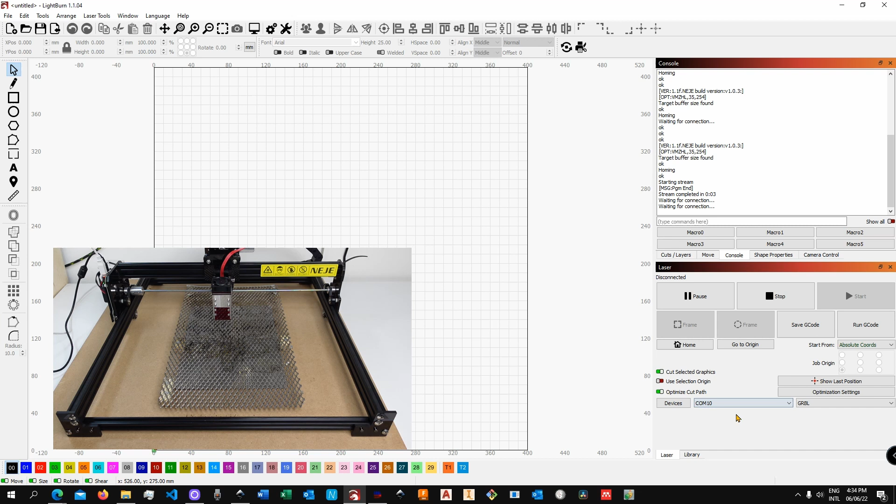Now, something else you will want to do is switch to the machine, GRBL, so that it gives you all the parameters for that specific machine. Now, you can see we lost the connection. So what you want to do is go to choose and back to COM10. Once you do that, the machine will automatically home, which means the connection is all right. You can see over here, okay, homing, and then okay.

The console is a very important thing that, with time, it's good to know how to read. It is not important when you get started, but over time you will realize it is actually good, because it will help you out with other stuff, problems, diagnostics, and so on.

All right, so now, similar to what I did with LaserGRBL, let me give you a very quick overview. This software is massive compared to LaserGRBL and the Neje desktop application, so it's not possible to show you everything, but I will try to show you the most important things to get started.

Once again, over here we've got the canvas in the center, which this time has the exact dimension of your machine, so it's 400 by 400. You can see over here the coordinate system. Then what you will need to know.

Let's start from the top. On the top you have some tools, okay? Some are for file import, and others are for control of whatever you have loaded, like grouping, flipping, and positioning, and whatever.

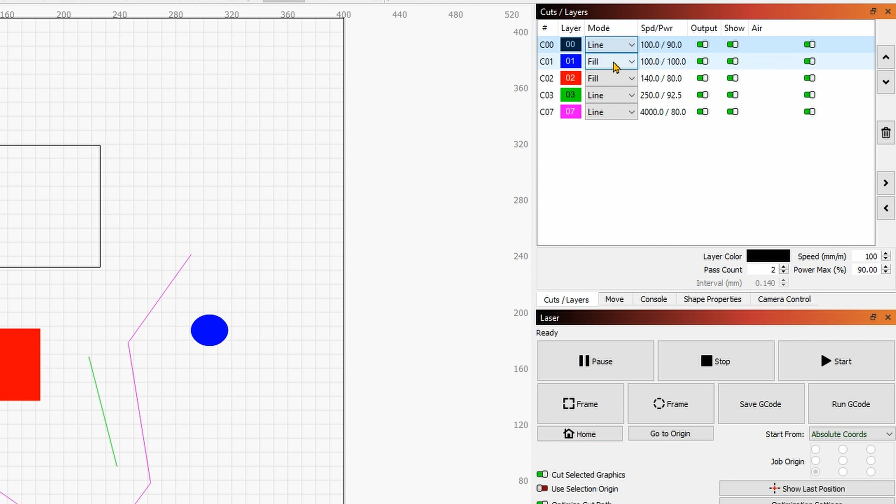Then you can see over here, on the bottom of this section called cuts and layers, you have the layer color, the pass count, so how many passes you want. As I said, in LaserGRBL it's the same — if you want to cut, you might need to pass multiple times in order to actually go through your material. Then you have here the speed, for example, the power, and the interval.

Now this interval will be applicable for things with fill. If you go to the blue layer, which is set to fill, so that's going to be effectively full, you can actually change up and down the interval in millimeters.

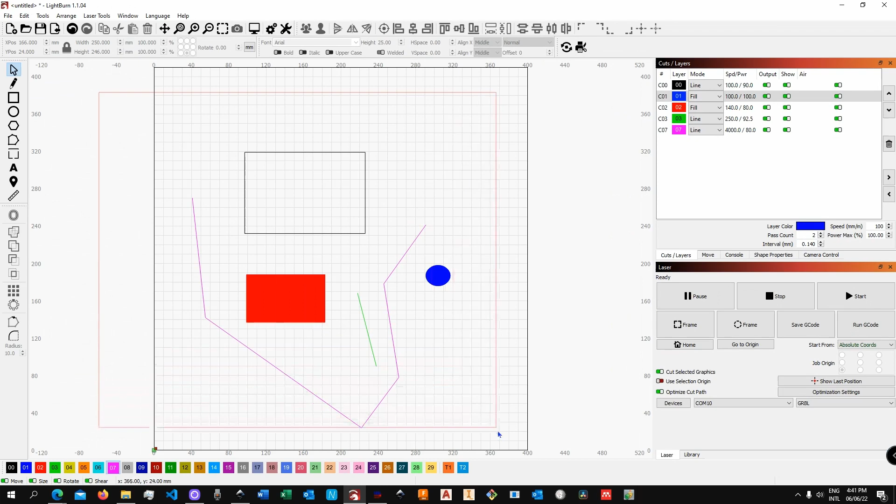Okay, now the approach in this software is a little bit different. In LaserGRBL we have lines per millimeter. Here instead we have the actual millimeter. Okay, and the other thing is that you can select what you want. You can basically instruct the software to cut only what is selected when you toggle this on, or everything, whatever is in between the canvas. So you can exclude things.

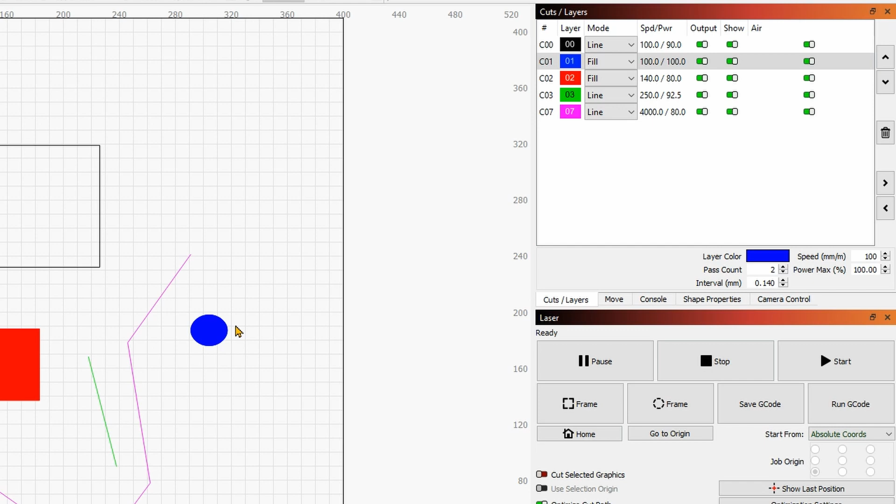You can also toggle layers on and off. So these layers that are now with the output toggled to off will effectively not be engraved, even if they are selected. Okay, so this is cool. You can reach a very high degree of control for your specific project. Okay, and the other thing is, let me toggle this back on.

Cut selected graphics. You can select. You can have your preview. Now here you have your preview. You can see the cut distance, also the rapid moves, and what is the estimated time for this project. 12 hours, 7 minutes, whatever. This is massive, what I did here. And you can also have a simulation of what is going on, as you can see. Okay, so you can click on play and you can see this moving back and forth.

Okay, then the other thing is you can also show the traversal move. That means when the laser is actually not engraving. And this is cool if you want to place something in between, or if there is stuff that the machine may collide with. You can actually rearrange the way this starts. Okay, there are many things that you can actually manipulate here.

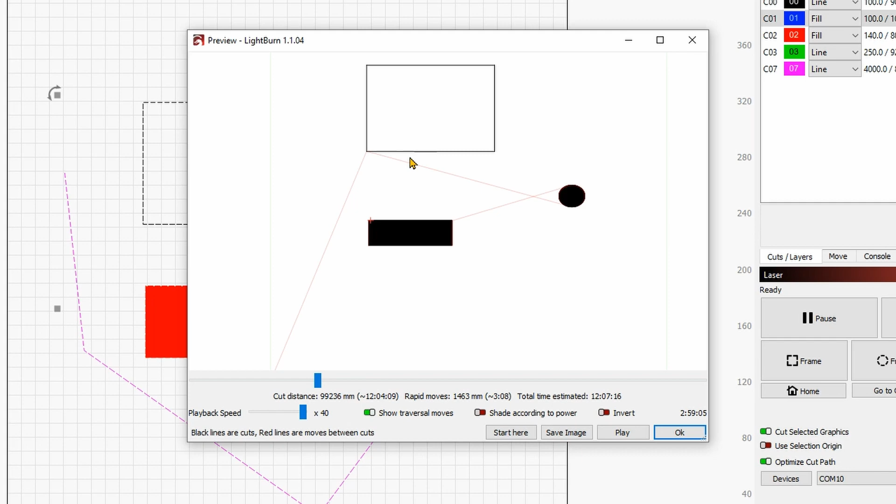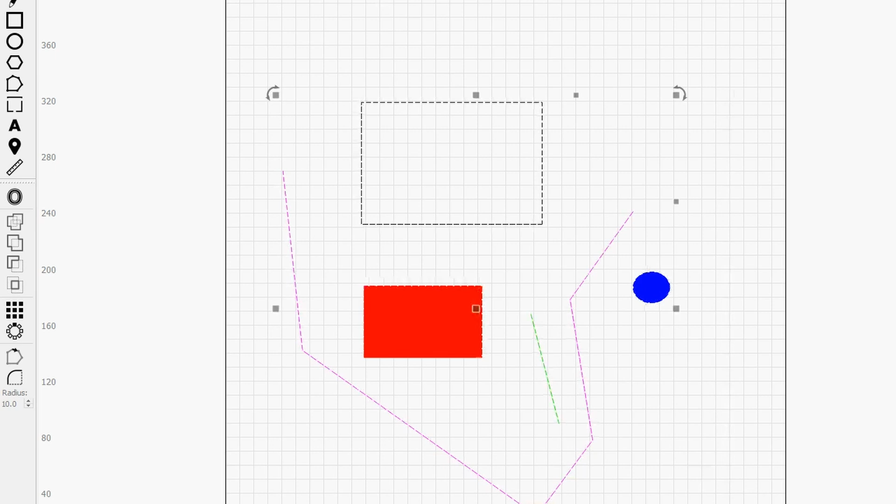You can also decide if you want, for example, this rectangle to start from one side or from the other. You can, for example, select here the start shape point, so you can set it over here or over here, for example. And now if we go back to our preview, you can see that the free move doesn't pass through this area anymore. So if in this area I had something, then it's not going to collide with it.

Okay, and that's something that you might ask yourself now. It could be, for example, a magnet to simply keep the material fixed to the mesh or to the base or whatever. And so you don't want the magnet to be kicked off by the laser module as it moves. And like this, you make sure that the magnet is not going to be touched. And you can also run a dry simulation. That means without actually giving power output, to see the machine moving around.

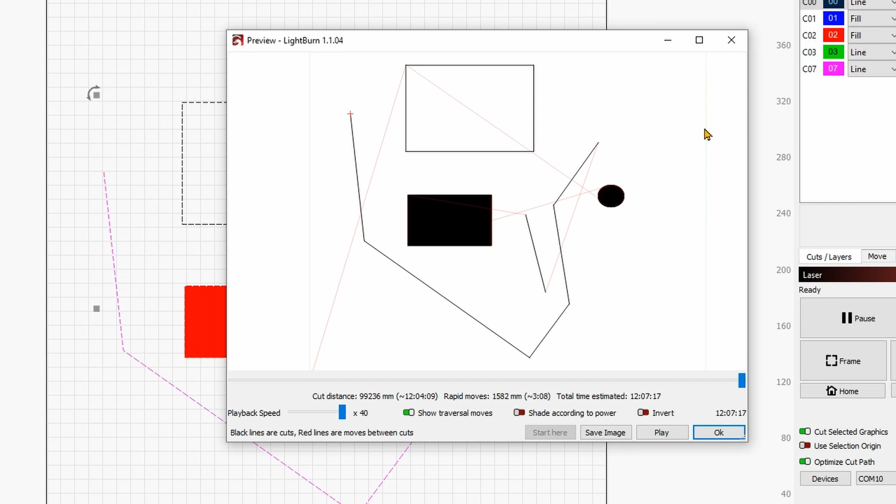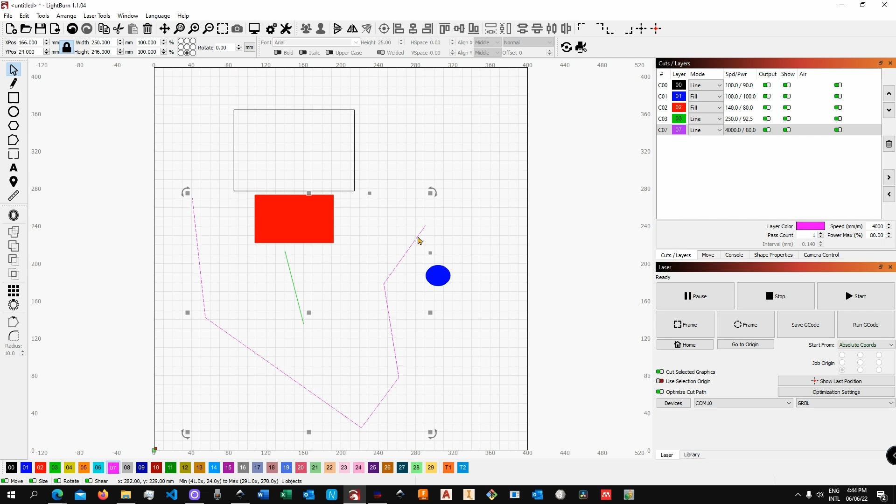Okay. And so as you can see here, we have a bunch of things that we can do. Select stuff, we can align them to the center, we can move them around, we can distribute them evenly, as you can see. We can do a whole bunch of things. Then we can actually edit this line. You have the edit mode, and so you can edit the independent nodes.

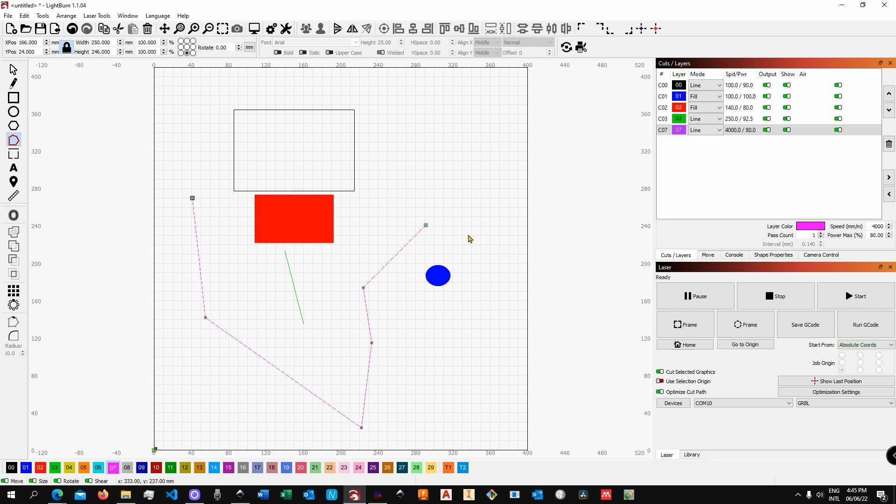A side note here is that you are not able, in this version yet, to actually position the nodes by coordinates. So unfortunately, and I hope this is going to be implemented in the future, but in Inkscape it's something that you can do, and it's very handy for designing purposes. But you can still move them around, and you can use the arrow keys to move them. My arrow key right now is set to 1 millimeter, so I know that each click is 1 millimeter. If I do shift arrow, I know that it's 10 millimeters, and so on. I mean, there are a bunch of things. It's like a huge software for this kind of thing, okay?

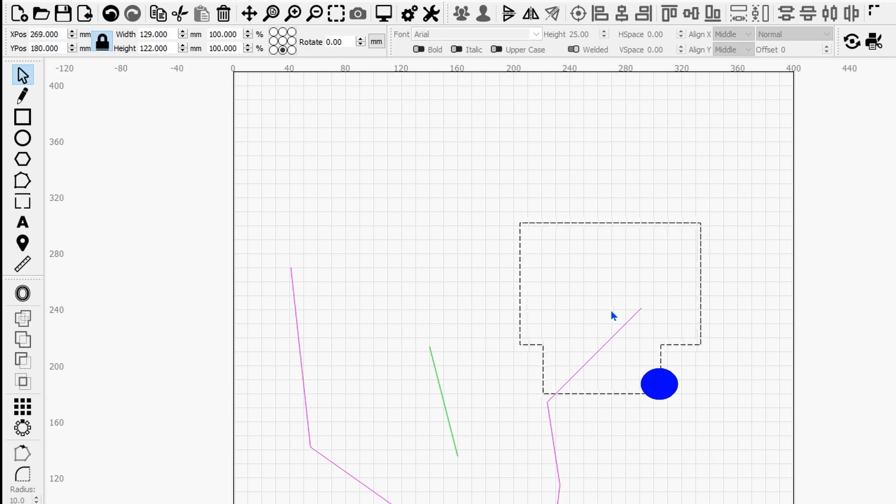Then, for example, we talked about the Boolean, so I can select this and I can, for example, weld these things together. And as you can see now, it's a single but more complex shape. Let me do this with the oval over here. So weld, and as you can see, now it's welded. It's a weird complex shape which you otherwise weren't able to do as easily as right now. And so you can basically draw simple things, and you are able to do more complex things.

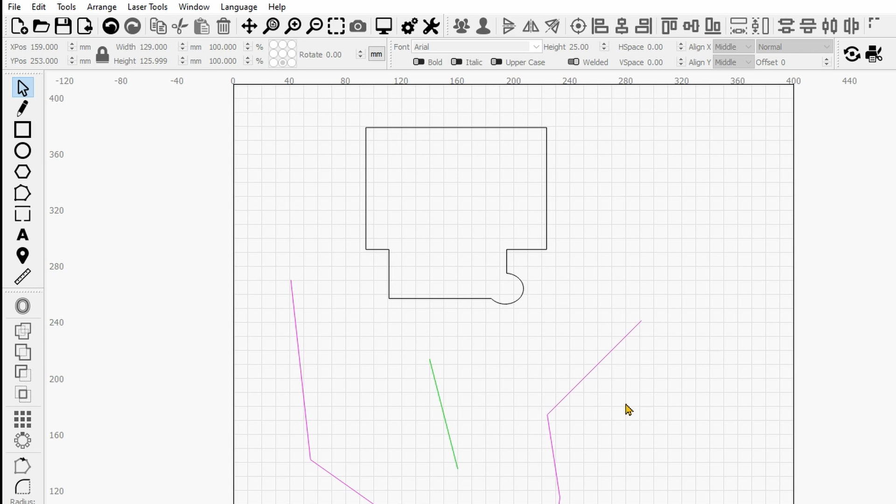All right, now without wasting any more time, let's see what we are going to engrave today. We've been cutting something with LaserGRBL in part 1 of this video tutorial. So in this case, we are going to engrave something, and I've actually prepared, let me see in the recent files, if I have my lion somewhere here. There we go, lion. Okay.

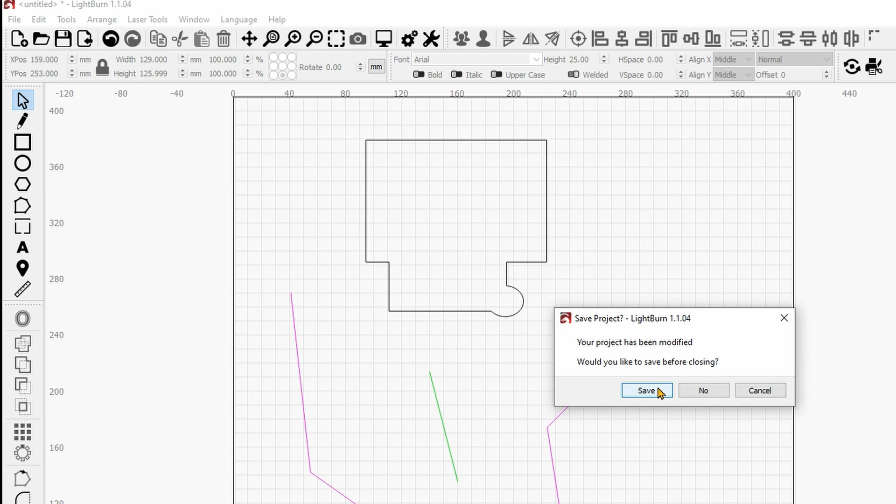Nope, I don't want to save it. There we go. This is the lion that we were trying to work out previously. Now here, if you right click, you can adjust the image. You can adjust the contrast, the brightness, again, all of what you want. Now I'm not going to touch them because I've already fine-tuned them, but basically you can see that we get once again some of the stuff that we have already seen in LaserGRBL.

So contrast, brightness. Here you also get gamma, then radius and amount. These are more specific stuff. Then the layer settings, as you can see, I got it back into Jarvis, but also here we have ordered, Atkinson, Dither, Stucki. Jarvis, as I said, is the best one. So then the line interval, the DPI, this is the quality or resolution. These are relevant for some of the type of modes. And then when you are basically done, you can see over here the actual result and click on OK.

Now, since this is an image, it's generating a standalone layer called image. If I were to import another image, there would have been another layer for that image. And over here, you can see we get again the basic parameters. By the way, something that I haven't showed you earlier is that if you double click into a layer, you get an entire world of parameters that you can set for the specific layer, depending on the mode you are in. If you are in line, fill, or fill plus line, you can see advanced and stuff. So as I said, many things going on in this software.

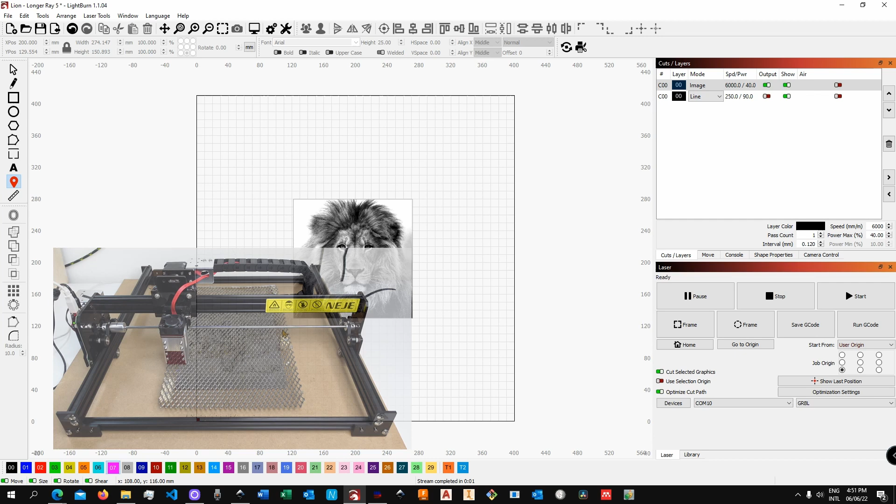Now the other thing that you can do in this software: as you can see now, it is located somewhere, I don't know if maybe it's the center. You have tools to automatically move this wherever you want, in the corners. Let's move it back to the center over here. Also, you can engrave in absolute or user origin, as we did in the previous software. So we were basically jogging around, which in the software is done like this. You can see we have this manual jog. I can move now here and the laser will move, or you can go over to the move tab, and here you can see we have once again the movements and a bunch of other things.

Okay, so this is used to set the user origin. Once you're happy with it, you can go ahead and click on set origin. However, what I like to do in the software is to go into absolute. That means that where you have your project, that's where the material is supposed to be. And so it is good to put your material and then eventually move this by hand to perfectly fine-tune it with the material, or alternatively move the material. However, moving the material by hand is a little bit harder than simply clicking this and then using the arrows to move like 1 millimeter, 2 millimeters, and so on.

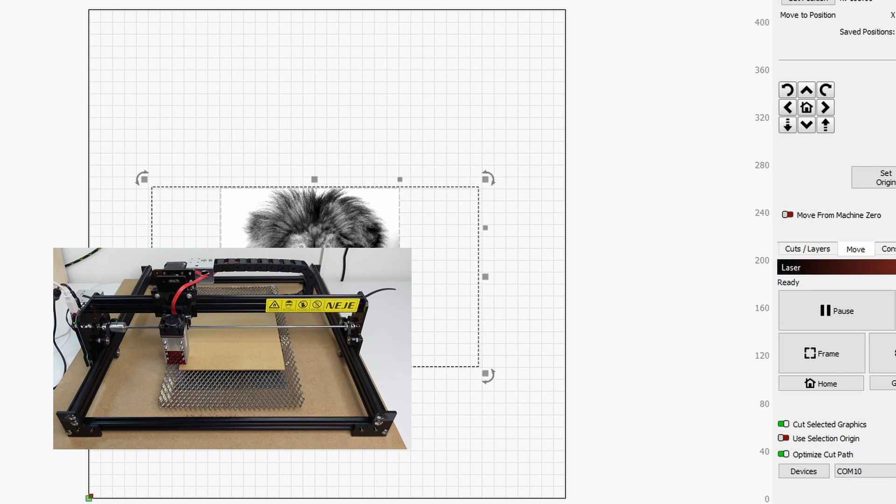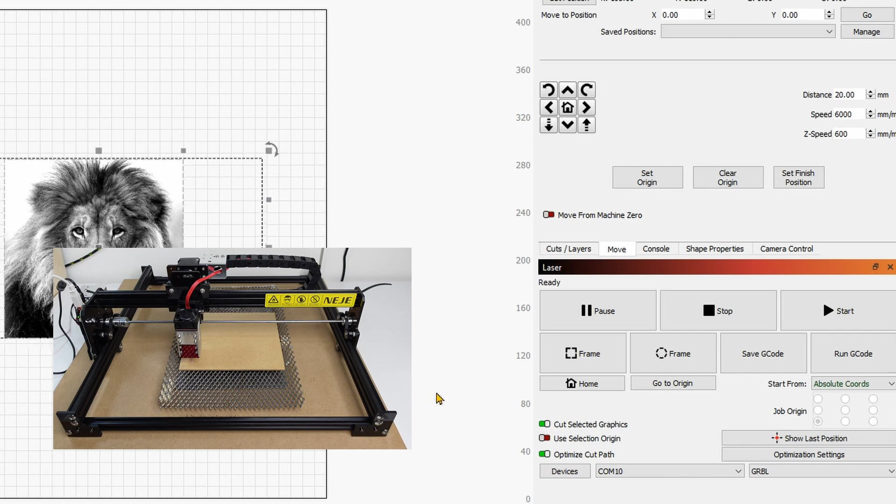Okay, now once you're happy with it, let's once again place the material beneath. You can click on frame once again. And you can move this whole thing around until you get to the position you need. And once you're ready, you can click on start.

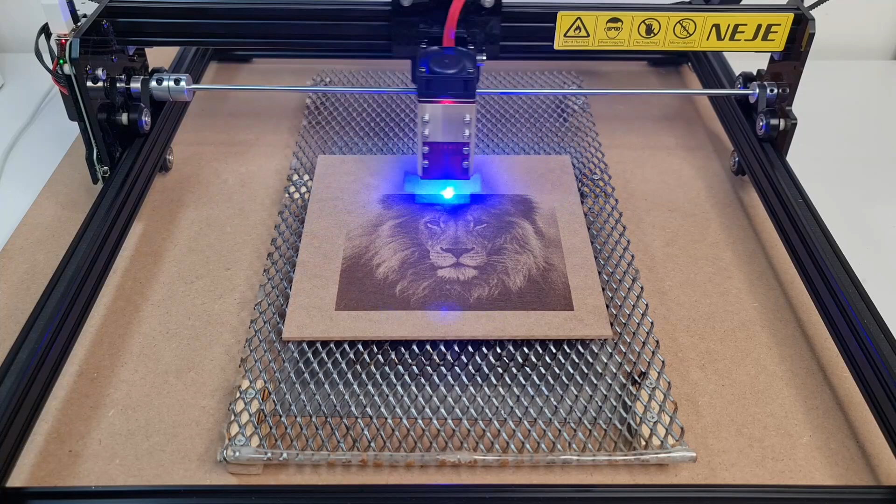Alright, so as you can see, we got a pretty decent result with this engraving. This software has a lot of things that you can customize from a design standpoint and also a layering standpoint. You can do a lot of things, and in fact, I'm just going to show you one more thing. Let's go and open some of my recent files. Let's see. There we go. Staf with notes.

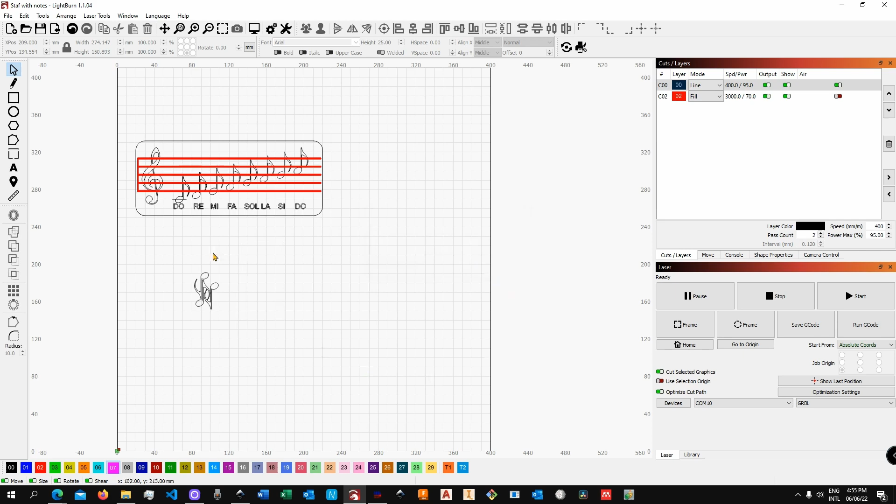Let's not save this one. So as you can see over here, this is an SVG file, coming directly from Inkscape. And now let me take one of those notes aside. So let me rotate this 180 degrees, okay. And

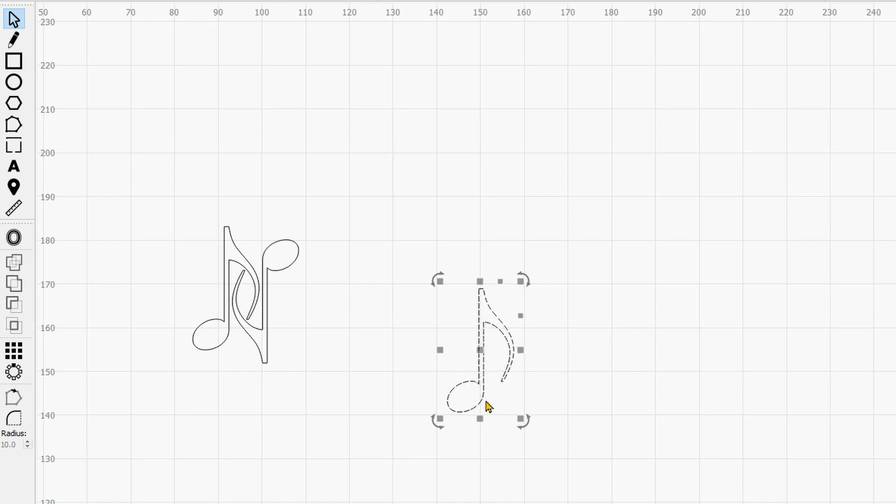the cool thing here is that if we notice something that didn't work out fine in Inkscape, you can click over to the node tool and we are actually able to manipulate this here, which is crazy, you know. You can do a bunch of things, which is pretty much what you were able to do in Inkscape. So that's something also good for you to know. So you can basically edit existing files.

And the other cool thing is that here, if you are a CAD user like me, you will be able to open DXF files. So let me try that. So file, open, laser engraving. Let me see, projects, maybe under assemblies, structure. What's this? Yeah, here we go. Open that up. All right, so as you can see, this is a DXF file.

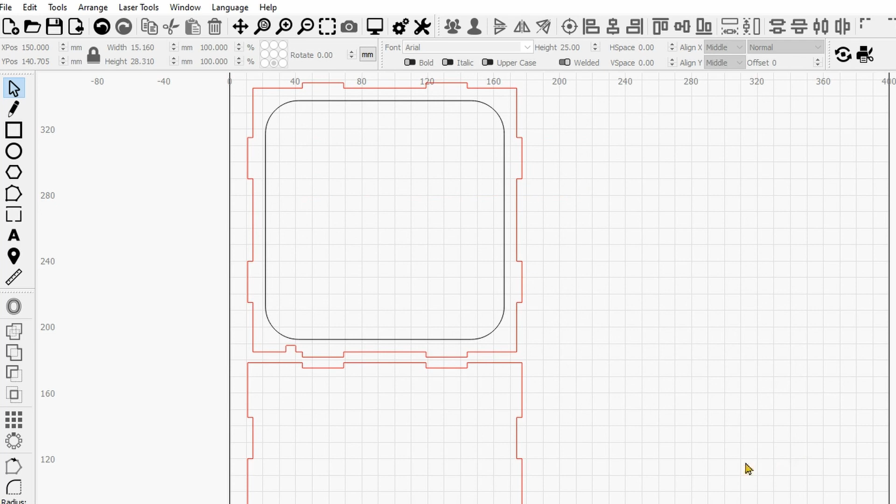Now this is my filter box, which I've designed in Fusion, and then I've exported all of the drawings as DXF, and as you can see, they are here, and I'm able to work with that. The other cool thing is, if for example you're working with AutoCAD, you can actually give layers to your design, and the layers will be matched up in the software.

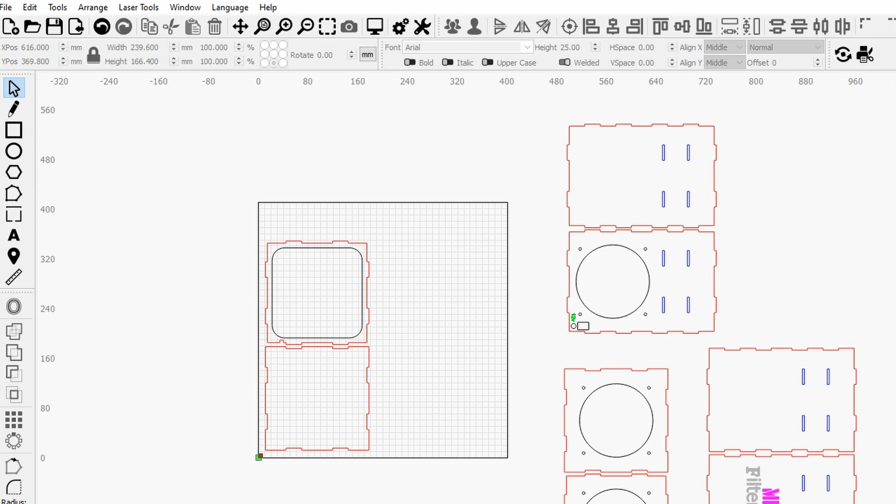Now, I think that if you've been watching both parts of this starter guide tutorial, you will be able to make up yourself the difference between the two softwares. I don't think there is much that I have to say. Now, what I can tell you though, this is based on personal opinion, if you're on a budget, LaserGRBL will work just fine. Bear in mind that you will be able to do most of the things between Inkscape and LaserGRBL. Inkscape will most probably be your editing software, and then LaserGRBL to do your engraving.

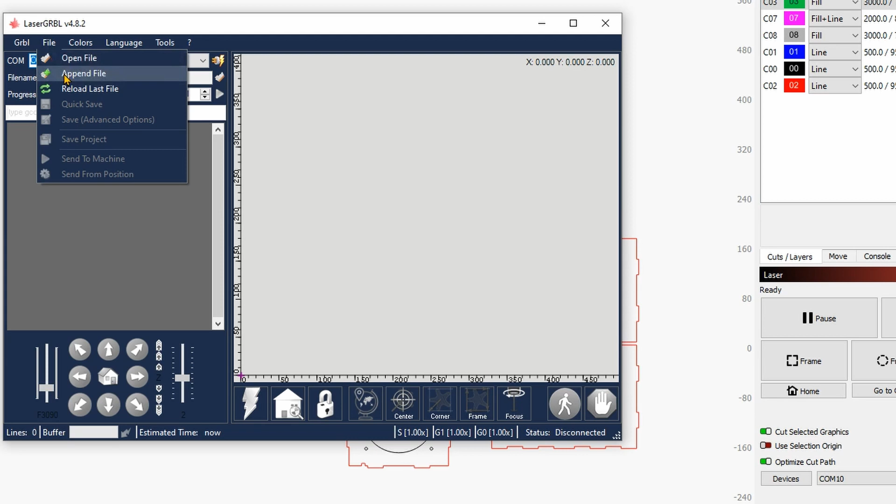In LaserGRBL there is an option called Append, which I guess I haven't showed you in part 1, but basically over here, file, let me reload the other one, create, and then file and append. Let me append the PNG file, open, next, create. Now, as you can see, I didn't change any settings. Now I have my musical key over here and my keychain. So they're both together, and one has engraving on it and the other one is cutting. Okay, so this is the cool thing.

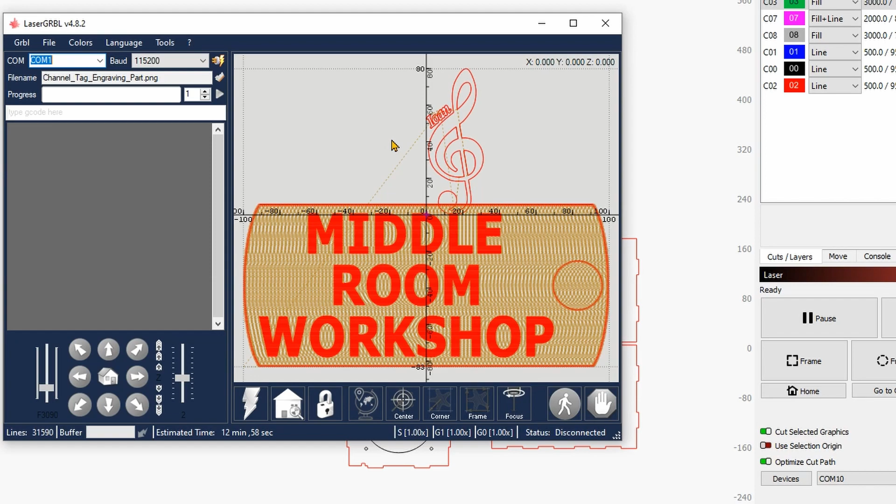Although you don't have the layers as you have seen in this software, you are going to have the option to append, and so you will simply need to prepare your files in such a way that they can be appended, and you can get your ultimate complex result or project. So you can basically do everything in conjunction with your vector editing software, which can be, for example, Inkscape. While in this software, everything is ready in one package. You can do complex things right away inside.

Well, there are things that you cannot do with LaserGRBL that this software can do, like tabbing and other things, okay? But in general, it all depends on the budget that you have available and also on your personal use. Now, if you're on a budget, and I know that $60 might not be in the pocket of everyone, then LaserGRBL will be the software to go. You can do everything. I've shown tricks in the past, so I have videos covering some of the things, and also if you have questions on how you can achieve certain things, you can leave them in the comment section below. So I'll be ready to help and give you my hints based on my experience.

However, if you're intending to use your laser engraver for many projects, especially complex projects combining both cutting and engraving, or if you're trying to kickstart a small business, trying to sell products, engrave stuff for friends and family, whatever you want to do, it doesn't matter. I mean, if you are intending to have an extensive use of your machine, I'll highly recommend LightBurn. This will pay for itself over time. It will make your life much easier because you can control things the exact way you want within the software. Okay? All right.